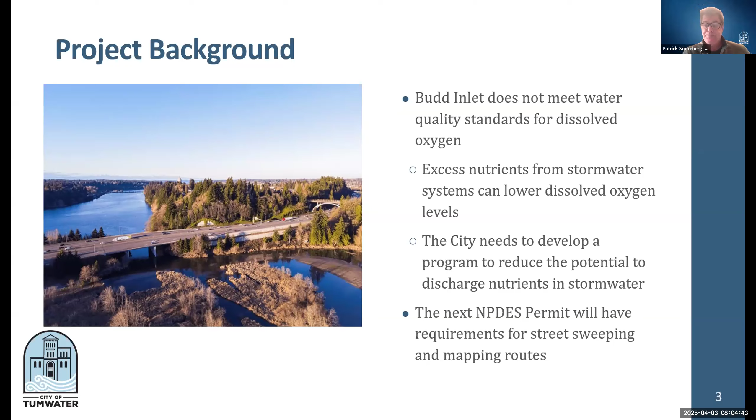The outcomes, as I started to explain, is to be able to go look at all of our conveyance system, map it all in GIS layers to make sure we know where each of our discharges come from, how big of an area, what types of streets they come from, and then develop strategies for sweeping routes that focus on specific areas with the highest potential to discharge pollutants into water bodies, where we could gain reduction with treatment systems and maintenance activities, as well as identify equipment that might be needed to carry out this plan.

Patrick, I have a question — are these mostly main roads? Correct, yes. Essentially any road that has a curb and gutter leads into a storm drain, and those get connected. Depending on the geographical area, some of them don't combine too many streets together, and others combine a great deal of streets together. Okay, so we understood most of those areas already mapped as far as where those utilities are.

But this would be a more comprehensive mapping to really focus on the collection areas of each one of those pipe systems and where specifically they go. Understood, so just getting very detailed. Thank you, that is correct. And then to have some specific strategies for reducing those pollutants, either through maintenance activities or treatment.

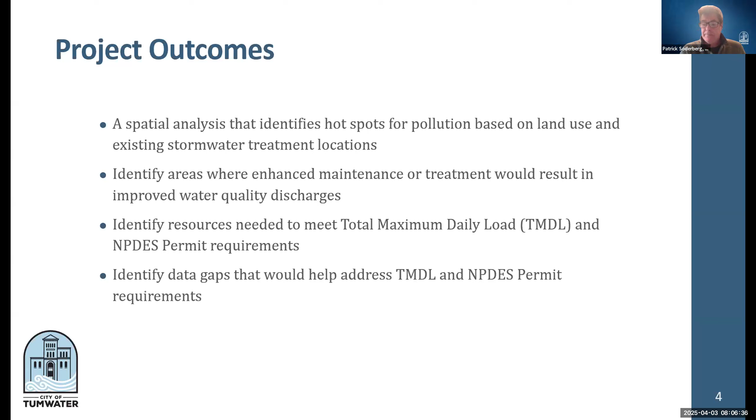So the ecology grant would be to develop this plan. That's the whole goal of the grant, to go and be able to hire a contractor to develop this plan. These are very specific plans that we don't have in-house capacity to do. And some of these activities, once you have the plan developed, give you opportunities for different grants to purchase things needed to carry that out.

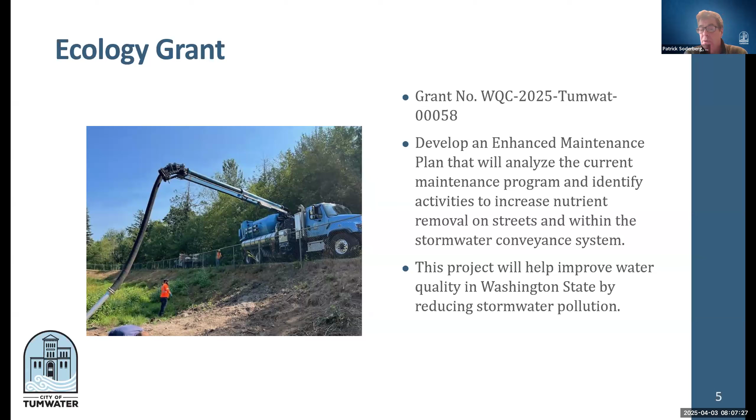One of the things in the past that Ecology had available was money to get, or grants to get additional sweepers. Those are very expensive, and having this plan would make us eligible for those types of grants if they come up again in the future.

So we've selected Herrera as a service provider. We did 2 rounds of requests for qualifications. We've worked with Herrera in the past and have a very good working relationship with them. We know they have done these sorts of plans before. They're very specific, not a lot of companies have done this before. They are working with Bellingham and Tukwila on these exact same types of plans, so they have that background. We're currently working on a project with other regional partners with them that is similar, but is focused more on roadside treatment.

So the ecology grant is for $170,000 with a $30,000 match from the city. It would start as soon as possible and go through the end of June 2026. The service provider agreement is for $190,561. It does align with our permit requirements, and that service provider agreement would go until the end of June, same as the grant.

And here are the recommended actions again, both for the grant agreement and the service provider agreement. I can take questions at this time.

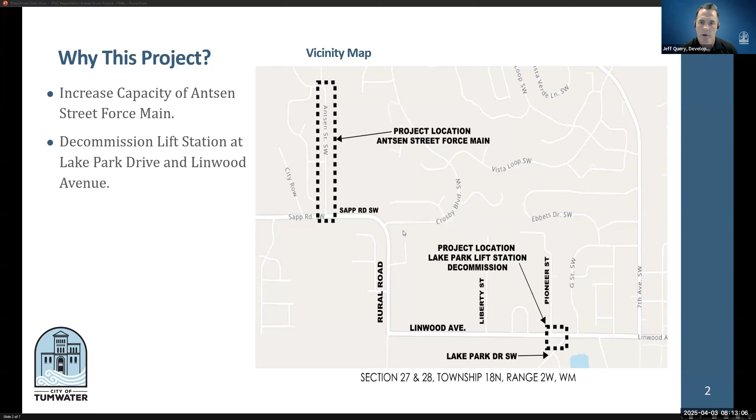The secondary portion of the project would be to decommission the old Lake Park lift station, which hasn't been used for many years. It's got active electrical equipment and is a safety issue, so we'd like to see that go away. Moving forward, here's a little more detail about the project.

The other lift station tributary to this line is Suncrest. The Suncrest neighborhood sewer flows here, pumps all the way down Linwood, around Sapp, and connects to a common force main, pumping to that same manhole. What we're proposing is to add a new independent 6-inch force main specific for Suncrest, so we'd have an independent line for Streamland and an independent line for Suncrest, creating a much more efficient system. It would also increase capacity within the sewer basin as part of our sewer comp plan, providing the ability to add more sewer connections to the system.

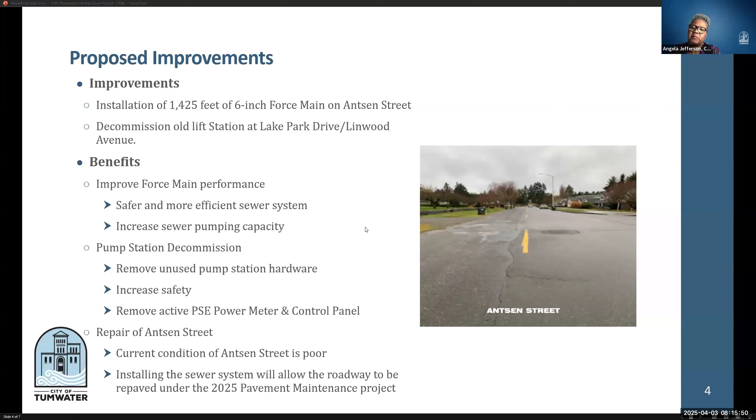The cost overview: we're expecting a range of approximately $340,000 to $420,000. The funding is 100% through our sewer capital fund.

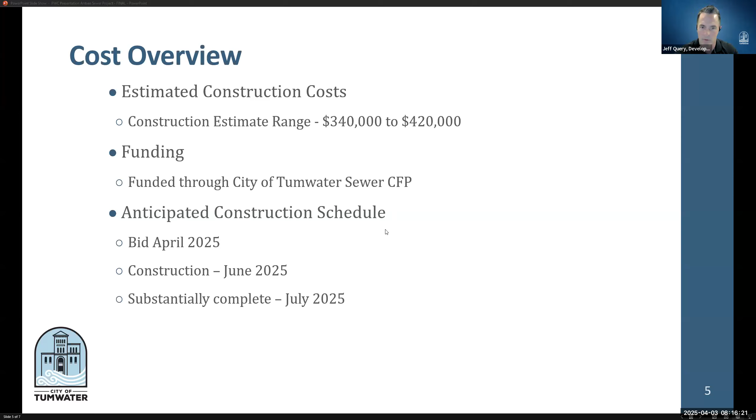Our anticipated schedule: we'd like to go to bid later in April, with a construction timeframe in June—about roughly 4 weeks of construction—and then be substantially complete in July. Shortly thereafter, our paver would come through and put a nice new road on top of that.

So that completes my presentation. Did anyone have any questions?

So the ultimate request here would be to place the Antsen Sewer project on the May 6, 2025 council consent calendar, with a recommendation to approve and authorize the mayor to sign a public works contract to the lowest responsible bidder. Thank you. Great, thanks Jeff.

I just wanted to clarify a couple of points. You're going to see later on this year a budget amendment come through. This was a project that, while we had done some preliminary design work previously, was one we had when we were looking at prioritizing some capital projects to move forward—it was a time and capacity issue at the beginning of the year. However, as Jeff noted, this aligned really well with the pavement program, so it was one of those where we discussed, hey, this project is ready to go. We've got some project efficiencies happening, and it's one we can fully cover with the sewer fund. We would just need a budget amendment because it wasn't previously considered to move forward this year. But we're going to do it, and you'll see that again later on this year.

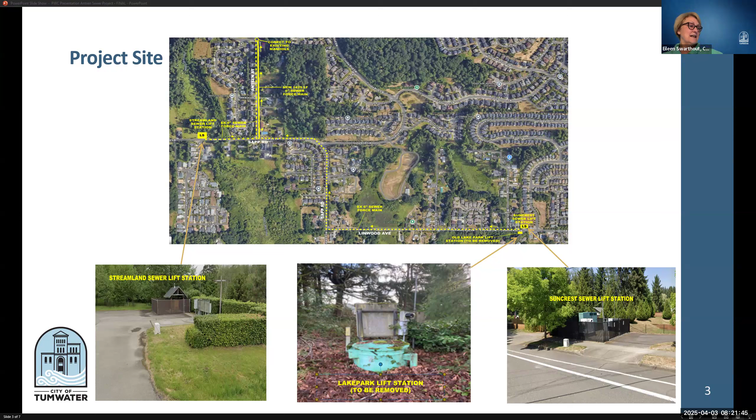All right, well thank you. You bet, thanks Jeff. This is a good project. So we have a recommended action before us to place the Antsen Sewer Project on the May 6, 2025 City Council consent calendar with a recommendation to approve and authorize the mayor to sign a public works contract to the lowest responsible bidder. So moved. I'll second. All those in favor say aye. Aye. All right, that one is passed.

Thank you so much. All right, and now we'll be moving on to resolution R 2025-008, a development agreement with Tumwater 70th Avenue LLC for conversion of on-site septic to public sewer service.

Dan, you have the longest titles. I know, we gotta work on that. That's why we love acronyms so much, because it helps us tell our stories without necessarily giving you all of the words necessary there. Like NPDES, National Pollutant Discharge Elimination System, every time we go to talk about that.

Okay, so hopefully you're seeing the presentation side. If not, are you seeing the presentation screen here? You're seeing the notes, huh? All right, let's see if I can't flip that around. Let's see, switch windows.

You'd think we'd get this down by now. I know, right? At least you know how to do that. I don't. It's an issue when I have my home computer versus my work computer versus my home screen, and which one am I looking at, and which buttons do I need to press.

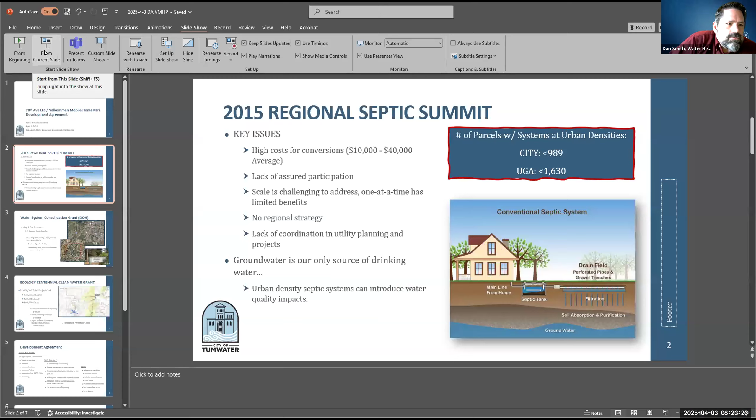You're good when you hit the slideshow. If you want to hit that again. Okay, and where was the switch? There's ways to switch with which view you're looking at, because I'm seeing my screen there. There we go. Now you should just be seeing my notes. Or I mean, now you should just be seeing the slides.

All right, fantastic. Well, with all this talk about sewer, thanks Jeff for that. Kind of bring us around to this side of the world.

We're talking about the development agreement and the resolution for the Velkommen Mobile Home Park conversion from septic system to sanitary sewer. Councilmember Swarthout, you might have been around back when we were talking about the regional septic summit back in the day, working with Thurston County and the city of Lacey and Olympia, identifying the challenges around urban density septic systems.

Urban septic systems in and of themselves are a good use of technology to help dispose of and treat wastewater. But when you have them at urban densities—less than 1 acre apart or 5 acres apart from the next one—they can add more pollutants to the groundwater and challenge drinking water systems.

Luckily, we're trying to get ahead of that. The Velkommen Mobile Home Park, through that work with the Regional Septic Summit, was identified as one of our higher risk neighborhoods that the city would be aiming to convert from septic to sanitary sewer, public sewer, which gets treated down at the LOTT Clean Water Alliance at Budd Inlet.

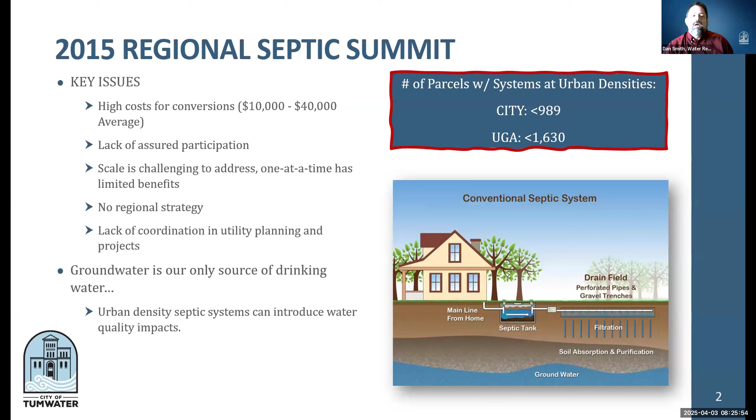So we want to create some programs that incentivize folks, and we've never actually had an incentive for a project as large as this move forward. Most of our stuff is for single family property owners, and it was a couple years back—I think 2019, 2018 now—

Velkommen Mobile Home Park approached the city and asked if there was any way they could work with us to get onto city water. Prior to that, they were working with a private property owner adjacent to the Velkommen Mobile Home Park, where they had a singular well basically for multiple properties.

And that is a fraught process. However, sometimes there's property owner changes. Sometimes folks that were caring for those wells have passed away or moved, and two-party wells can become somewhat of a challenge. So they approached the city.

And from that, the city was able to acquire some of the water rights that were serving Velkommen Mobile Home Park. And the Mobile Home Park folks got incredibly tasty, fresh, cold Tumwater water for themselves. So it was kind of a win-win there.

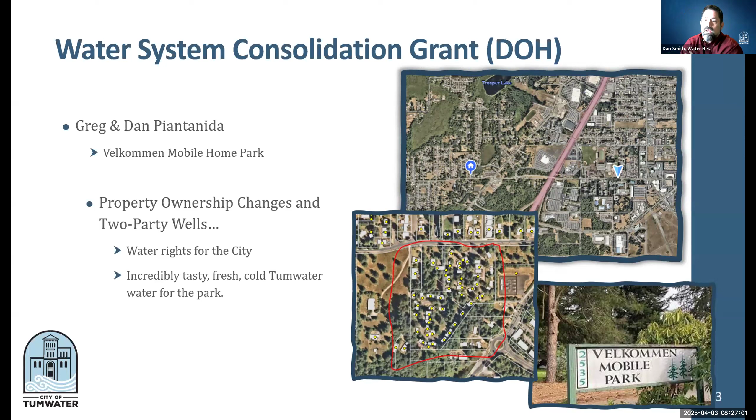And during that process, I talked with Greg and Dan and said, hey, you guys ever think about converting over? We do have incentive programs, and we could work with the state to see if there's any additional funds out there, because a project like this—converting 39 units from septic system to public sanitary sewer—is not cheap.

We penciled this project out a couple of years ago, looked about $1 million, of which $666,666.66 was eligible through Ecology's permitting system, and that number is just an odd number. That was the eligible cost, of which Ecology committed $500,000, and the city is matching with $166,666.67 to meet those full costs.

For the grant itself, because this is unique in nature around a public-private partnership, we are looking at putting together a social marketing campaign. You might have heard Meredith previously talk about this work they're doing, and effectively what we're trying to do is help other folks in the state. This was kind of an ask of the state to help other mobile home parks and folks like that who'd be interested in converting over.

What does it take? What does that process look like? Meredith is working on those. So you still have her for a couple more months working on some stuff with us in the background. That's why you see folks like me presenting on this project and Patrick presenting on the stormwater project. These are also two projects that were formerly held by Meredith, so she's still working on those pieces.

I know Greg and Dan are excited to get going on the construction side. They've been working with our engineering team for probably a year plus to make sure they've got the designs and are meeting the standards. So what do we got here? And I see Greg popped in to say hi. Greg, before I get too deep into this, if you want to offer, say something, feel free.

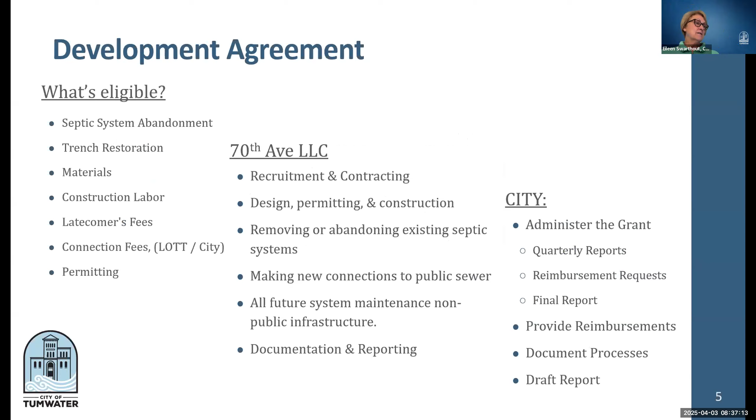All right, I did have some questions, just wanted to circle back on the numbers. So there's a grant that covers a third of the estimated project cost, which is coming in at 2.3 million.

Is that the total for the septic conversion piece? Yes, but that includes adding 10 pads. And because we're adding pads, we needed to bring in a fire hydrant, widen the streets, and meet some of the city's other requirements. That doesn't include the housing that'll be put on top, correct?

It does not include that at all. Okay, so who's it eligible for? Are you going to be putting homes in place, or is that up to someone else, or is that a project you'll be doing?

No, our experience is that when we're dealing with age 55 plus people, they really want simplicity. So our experience is we would go ahead and buy the homes, put them in place, and then advertise those homes for sale, where somebody can walk up and see the home, the decks, the parking area, the carport, if appropriate.

It's just a lot easier. We could sit there and wait for people to buy homes and then find our park, but that's a very slow process. In this case, when you're spending 2.3 million less the grant, we've got to move our economics quickly to support that expenditure. So to sit around and wait 5 years for those pads to be absorbed is just not going to work for us.

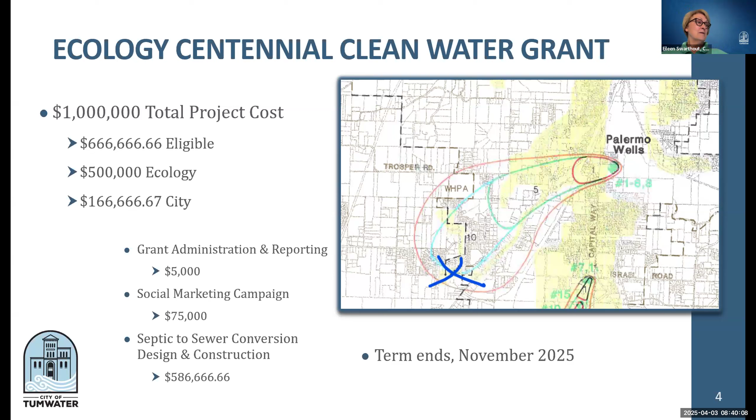So we do have a resolution before us, a recommended action stated by Councilmember Jefferson. Do I need to reread that, or have we already read it into the record? The reading is sufficient, but if you could make the motion again, that would be appreciated.

Okay, all right. I'd like to make a motion to place Resolution R 2025-008 and the development agreement with Tumwater 70th Avenue LLC on the April 15th, 2025 City Council agenda for a public hearing, and recommend council approve and authorize the mayor to sign following the conclusion of the public hearing.